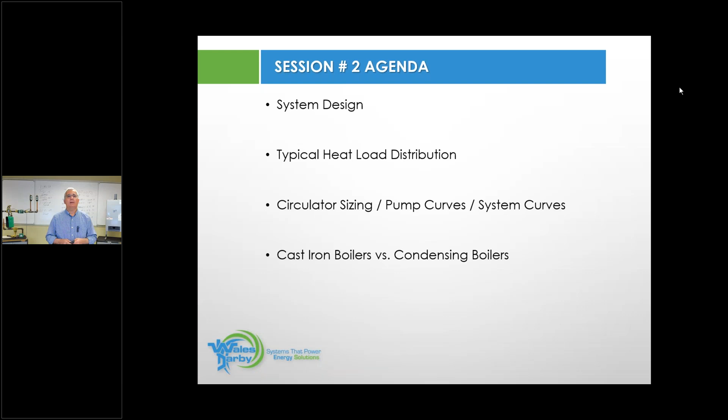You have to show the inspectors that you've done the work, you know the BTUs, and you've done the right amount of research in order to size the equipment properly. To let you know what's inside the manual J is what this takeaway is all about.

This is the math, all right? Now there's all kinds of different software programs out there to do these heat losses. Manual J is just one of them. Uponor LoopCAD does a heat loss. It does it for a radiant system, or you can do it for baseboard. It does not matter.

SlantFin always had a program out there. There's a whole bunch of different ones. Some of them are free, some are a subscription, but you really should be comfortable understanding how to do this, because for the guys who do this, it gives you a huge advantage versus your competitors who don't. You'll be able to size the equipment exactly down to where you need it to be, and that gives you a distinct advantage when it comes time to purchase material. Somebody else may be just exchanging material for material, BTUs for BTUs, and there's a very good chance in the world of boilers that boiler was dramatically oversized. So this will give you a very good price advantage.

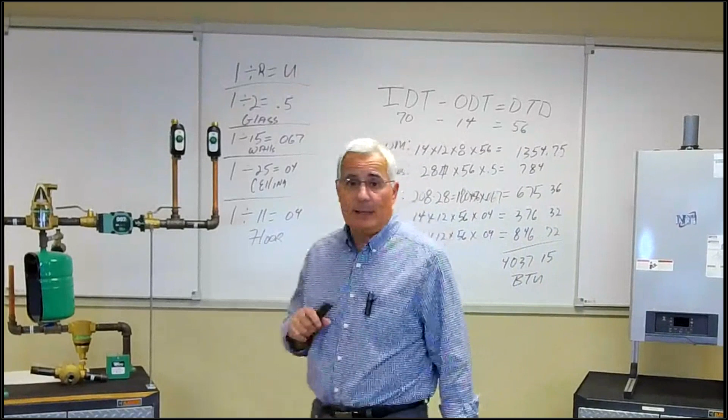Okay, Chris, if we can go to the board, please, behind, if you could zoom in there. So here's our room. I put together a room for you guys, and this happens to be my master bedroom at my house, which has 2 exposed walls, no heat above, and is over a crawl space.

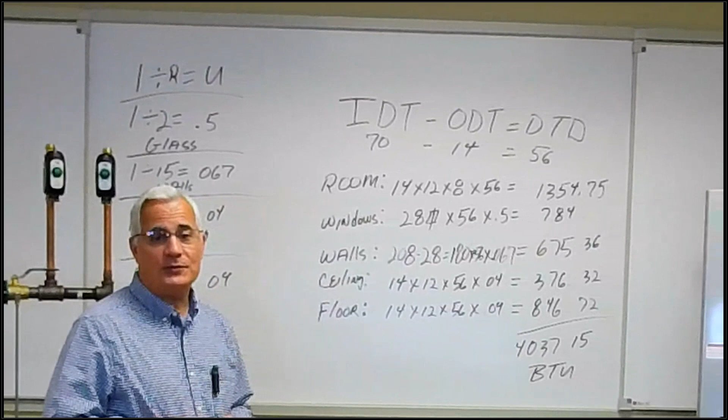So it's a big, big challenge of a room to heat, to make comfortable.

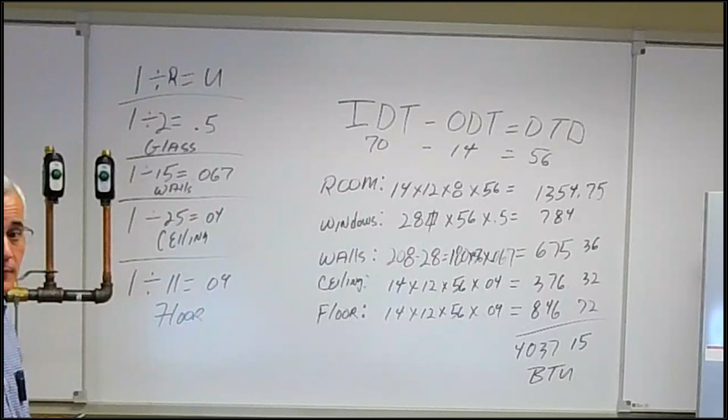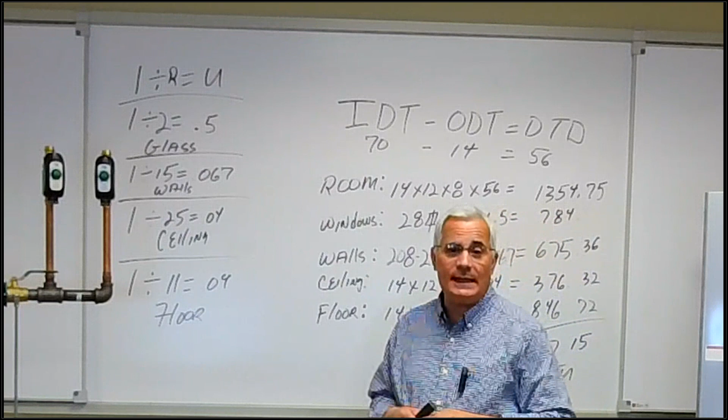On the left here, I hope you can all see that we made up our U factors. To get the U factor, we divide 1 by R. For my glass, which has an R value of 2, 1 divided by 2 is 0.5, so I'm going to use 0.5 for my glass U factor. For my walls, I probably got an R15 since the house was built in the 50s, so we end up getting 0.067 for my U factor for the walls.

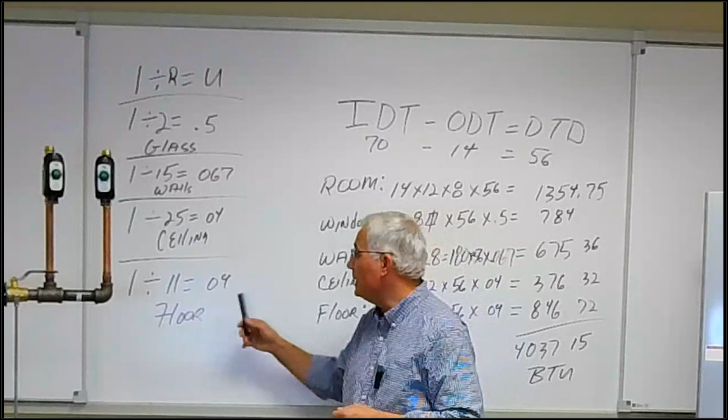The ceiling's about an R25, I should tighten that up, and that U factor becomes 0.04. And I am over a crawl space, so I did have to insulate my floor, so that U factor becomes 0.09. Yep, 0.09. So these are the U factors we're going to use in this heat loss for this particular room.

The room is 14 by 12 with 8-foot ceilings. So I got my 14, my length, my width, my height, times 56, my design temperature difference. If you plug those numbers in and math it out, you'll get 1,354.75 BTUs. Then the square footage of glass in this room is 28 feet, times 56 again my design temperature difference, times the U factor of 0.5, gives me a BTU of 784.

Then my walls, right? I've got a 14 and a 12-foot wall, that's the running linear feet of my outside walls. Add that together times 8, I get 208, but I have to subtract the square footage of the glass, that's where the 28 comes from. So I get 180 times 56, which is my design temperature difference, times my U factor of 0.067, to get another BTU of

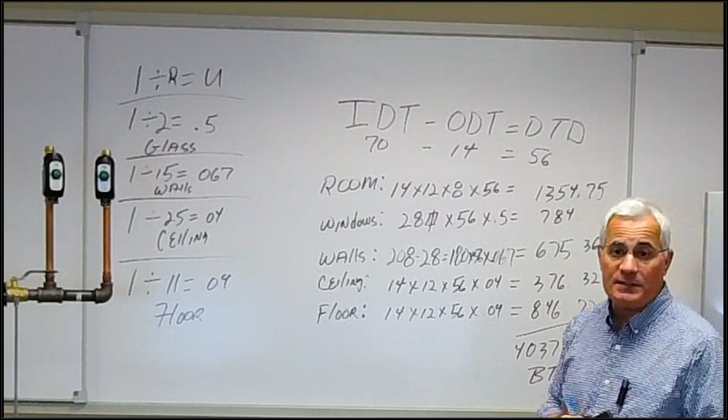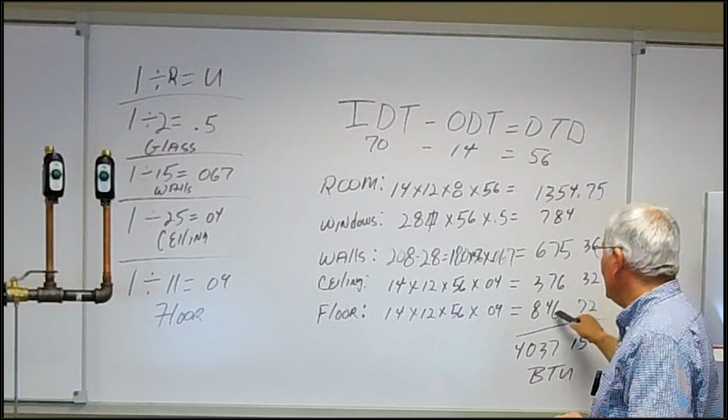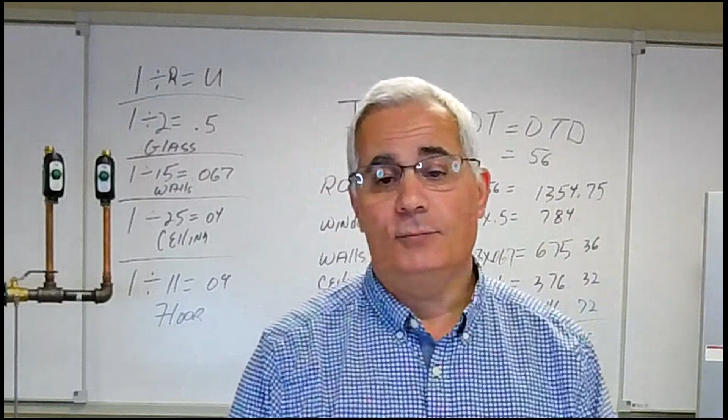675.36. I have to do my ceiling because my ceiling is exposed. So the 14 times 12 times, again, the design temperature difference of 56 times the U factor of 0.04 gives me 376.32 BTUs. Same thing for the floor, except the U factor is 0.09. Add all these BTUs together for 4,037.15 BTUs. That's what that room needs in order to maintain a room temperature of 70 degrees.

That was a speed date on how to do a heat loss, but that's what you're seeing in front of you with this design, the takeaways. I just plug numbers in on a particular room in my home.

Questions? Robbie, what do you think? You were looking at it saying, what's he doing here?

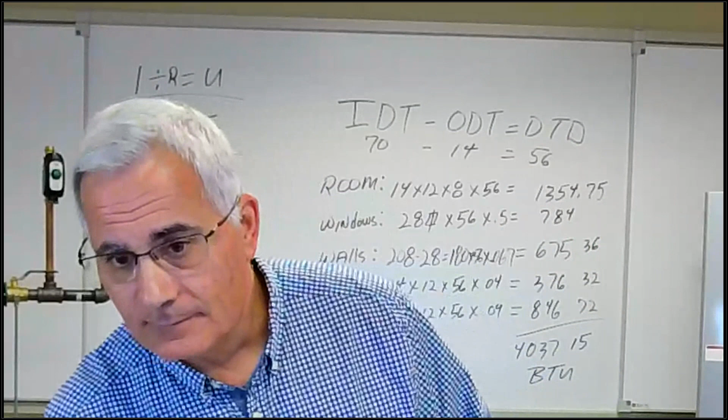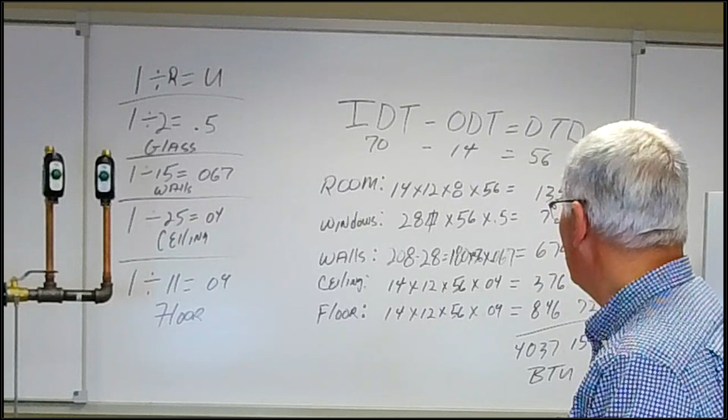I don't understand how you got the 1354 for the room. Well, it's 14 times 12 times 8 times 56, that should be the math if I mathed it right. Did I do it wrong? I got 75,264. How'd you get that high a number? 14 times 12 times 8 times 56, yeah. Really? Hang on, I could have fat fingered something, that's easily done. So 14 times 12 times 8 times 56. Holy mackerel, you're right, I think we forgot something there.

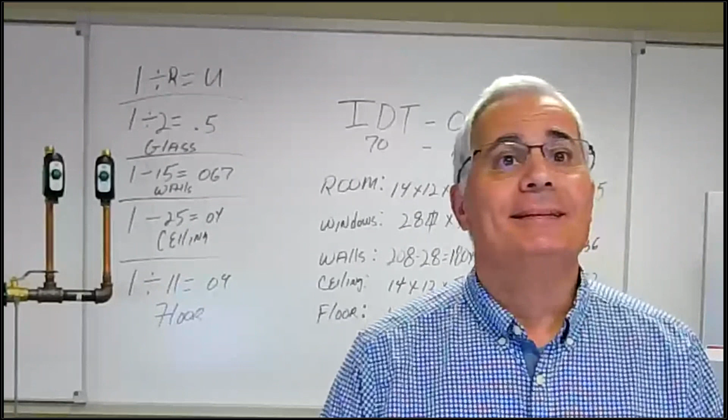Something's not right with that equation. What did I do wrong? Oh, this is embarrassing. Thanks, Rob. Well anyway, that's what you would do here: length times width times height times something. Oh, I forgot the infiltration factor, that's why. I forgot the infiltration factor of 2 outside walls, which is 0.018. Sorry about that, guys, we got to plug in 0.018 right here, and that's how you get that number.

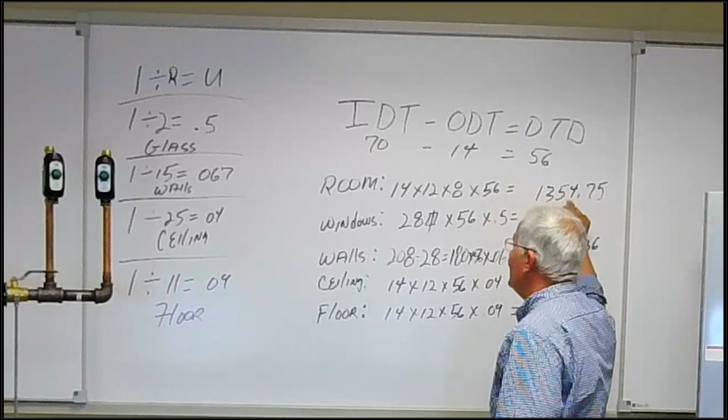Oh my, well, as they say, stuff happens. I hope that made sense. That's a little embarrassing, but it happens. Sorry, Jim. No, that's fine. And I even have it written right in front of me, shame on me.

Okay, so moving forward then, we would do this on a room-by-room basis. So my next slide, Chris, if I can have control, please. Real quick, Jim. Yes.

The chart you were just looking at, what page is it on in the Taco catalog? Do you know off the top of your head? That chart was part of our downloads, so it's not in the Taco catalog. Which one, the Taco TACO-Ways? Is that actually in here? I don't know, I'm sorry.

You didn't give me that one, just upload. Oh great, we're really striking out today. So we didn't send the takeaways, my bad again. Is there any way we can get that on there real quick? We'll send it to you guys after, we'll send it to everybody afterwards. All right, live podcast, here's what happens for live webinars. Jeez, all right. And then I got another question.

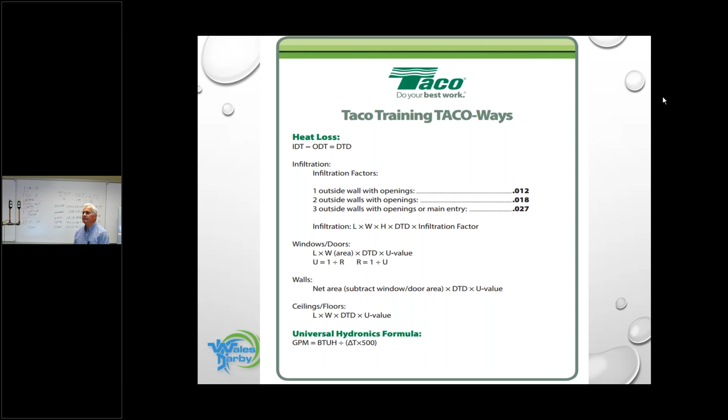This gentleman is asking, so you're saying 7 feet of baseboard is what you have? In that particular room, that's about right. Actually, they ended up putting 10 feet in. That is correct. It's a tough room, a very challenging room.

I have other problems there, I need to really tighten up the whole house. I can tell you, siding the house and putting Tyvek wrap around it made a massive difference, and also replacing the windows with better ones. At one point, 2 of the windows were just single pane, and oh my God, I could feel cold air washing over my face laying in bed. It was rough, but now with all those changes, the room's quite comfortable.

That particular room is zoned to the front of the house. That loop encompasses the front of the house and covers the area in the back. So that thermostat is in the front of the house. The way to get around that is I have an Ecobee stat in the front with a remote sensor in my bedroom, so now I get an average temperature reading between the two rooms. The comfort level in that room has changed completely.

That 7 feet or 10 feet, the gentleman's thinking really well. He probably did it based on high temperature, which is one way of doing it. But we're going to talk about options today for doing this with low temperature systems too, dovetailing off our low temperature webinar from about 2 weeks ago.

One more quick question: do all the values have to be multiplied by the infiltration factor, not just the room you're pointing out? Well, every room will have a different infiltration factor, because you could have a room with just one exposure, or a room with 3 wall exposures, or 2 wall exposures, right? They'll all be different. My wife's office has 1 exposure. But there's always going to be an infiltration factor, has to be.

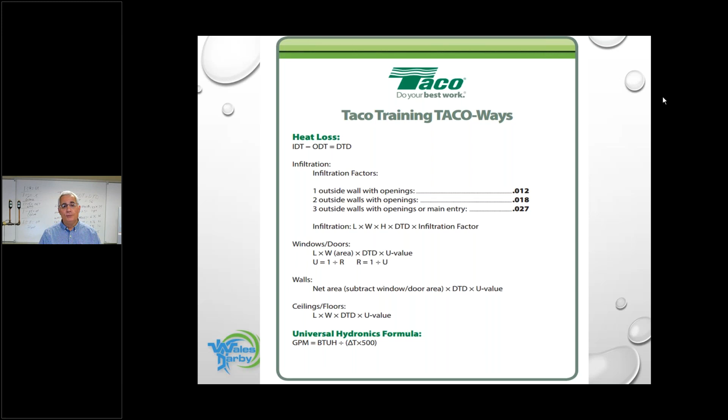Basically, what are we figuring out here, guys? We're figuring out the BTUs we're losing that we have to replace. That's what we're figuring out. So again, on a room by room basis, it's very, very important. If you don't know the BTUs per room, designing your system is going to be very, very difficult.

I can decide to set this up either as a standalone water heater for the baths and domestic hot water, or as an indirect, or as a combi. We seem to get a lot of people running to the combi, so we'll use a combi today in our design. What we want to be aware of is that we size the equipment as close to the load as possible. If our domestic and space heating loads get dramatically different, and there will be projects in our territory where the domestic load is much bigger than the space heating load, then we have to address that separately. We don't ever want to oversize a combi boiler for the domestic when the space heating load could be a lot smaller. But today we're going to use a combi since it's 2 bathrooms, 2 shower heads, not a big deal.

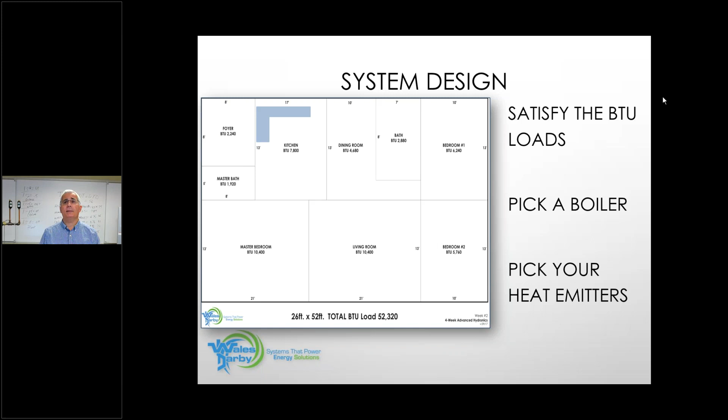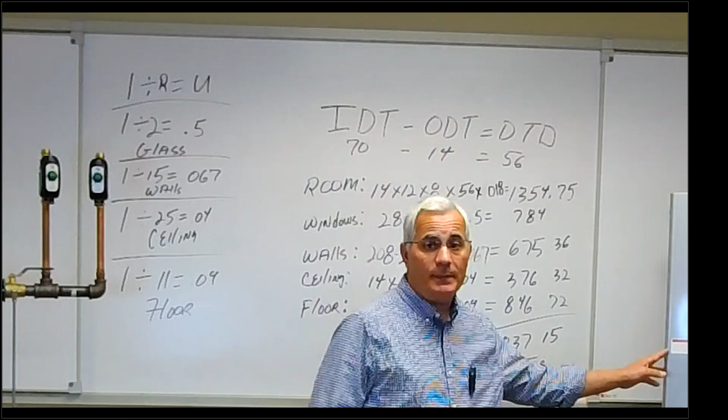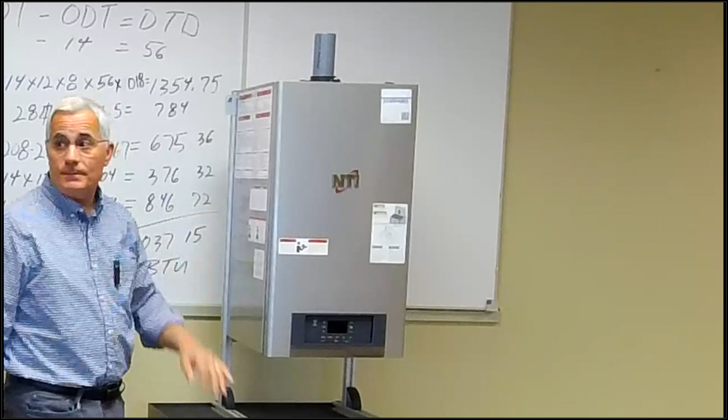So again, there's the NTI TRX. When you look at that boiler, Chris, if you can pan over here, I'm thinking the camera will pick this up. Well, maybe not, I'll move it a little closer. All right, this is an appliance design. The jacket has the color of a Mercedes-Benz. That all right, Robbie? All right, then we get the lights on there.

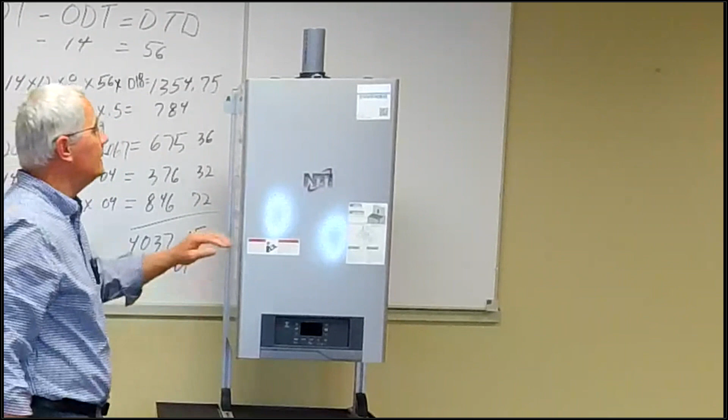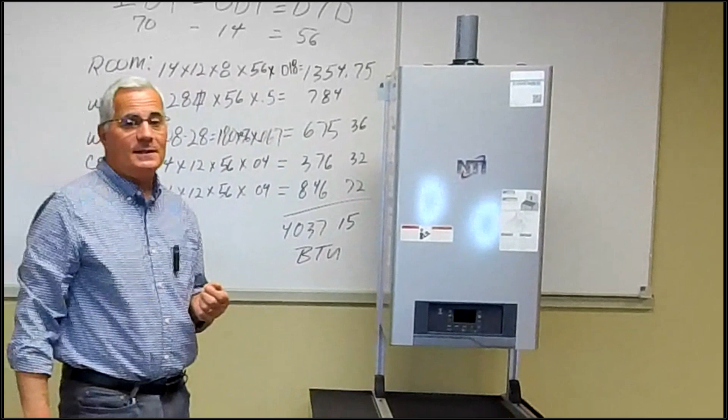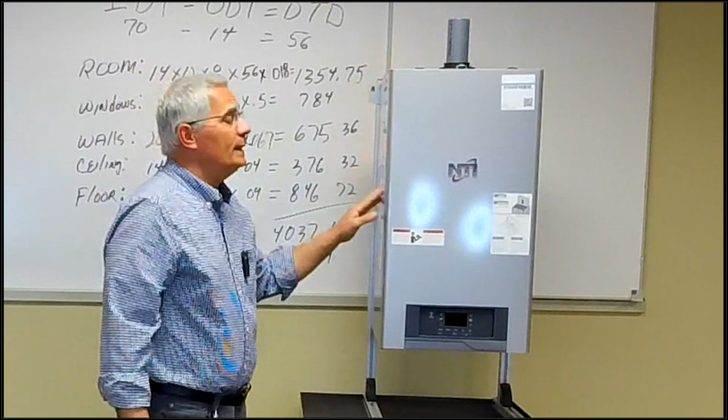Very simple control here on the bottom. This is actually designed to be within living space, because in Europe, that's what they do. They don't have basements, so it's not designed to be laying in a basement. In our world, it would be in a basement or maybe up in a closet on the first floor. We're going to have a 2-pipe system, bringing in combustion air and having our exhaust. Depending on how you set up your system and the temperature of your system, that will determine the material you're going to use for your venting, and we'll go over that.

Going back to the PowerPoint, on your screen is the spec sheet of the boiler. The first 2 columns on the left, under TRX 85 and 120, are heating-only boilers. Next to it, the C boilers, the TRX 110C or 150C, are the combis. We're going to give you the heating input, and you can see the range of these boilers. These are modulating condensing boilers, and they will condense if you're running them in the condensing mode.

If you were on our low temperature webinar that Anthony did, he went into great detail on what return water temperature you need. You need a 130 degree return to start entering the condensing mode, and the colder it comes back, the more efficient the boiler becomes.

So you see the range, 9.4 to 85,000 BTUs. These are modulating boilers that can fire as low as 9,400 BTUs. So this is an 11 to 1, a 10 to 1 modulating boiler. This is a big deal. You want these boilers to follow outdoor temperature.

Because the heat loss, we just did a speed date heat loss behind me, and we based it on the average coldest day of the year. It is not the average coldest day of the year every year during the heating season, it varies all the time, so our heat loss will vary hour by hour. If the boiler can adjust its output based on outdoor temperature...

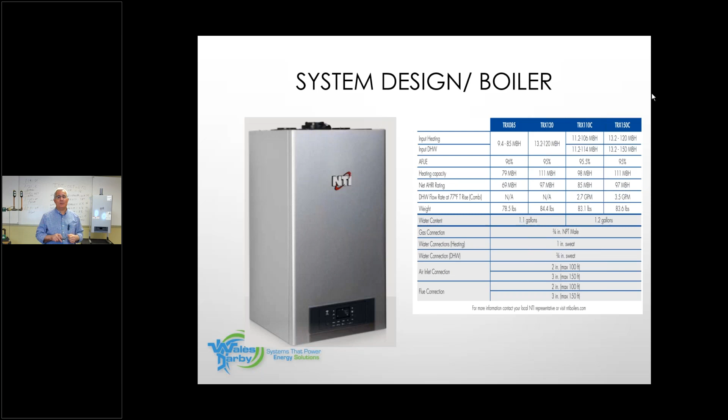Since you brought that up, my next slide happens to do with heat emitters. Every single baseboard manufacturer gives you a spec sheet that tells you the output of their product. A lot of guys we meet just think baseboard is a 180 degree type of system. Who says it's 590 at 1 GPM? Who says it's 580? Some specs will say it's in the 600s.

But I have other temperatures there. So the importance of doing the heat loss, that speed date heat loss I did earlier, is you may find that not only was the boiler oversized in Mr. and Mrs. Smith's house, but also the baseboard.

Since that was my master bedroom in my house, my heat loss for my house was 52,320 BTUs. I replaced a 130 net output boiler, and the amount of baseboard installed in my house is equal to 101,540 BTUs at high temperature. So knowing what I actually need, I can take the baseboard that's already in my house and feed it at 150 degrees.

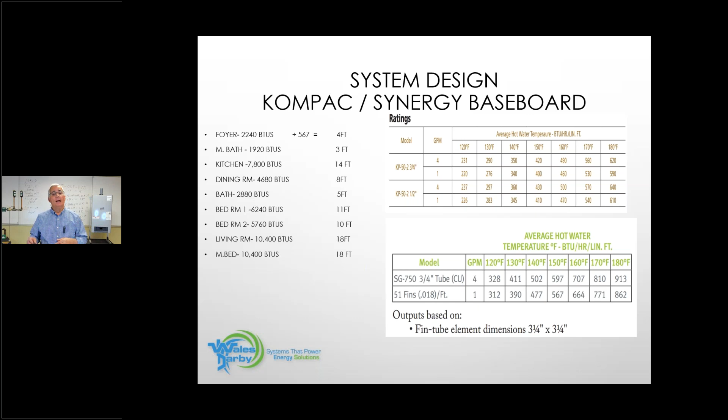This is on the Sterling website, SterlingBaseboard.com. But any manufacturer of baseboard will have these charts. This is nothing new, it's been around forever. Another option that you have is panel radiators.

What's a panel radiator? It's basically baseboard in a tighter package, or it can replace standing radiators that you've seen for years. They come decorative or they come industrial looking. It doesn't really matter, you can get very stylish looking types of panel radiators.

But a product like this is something to consider when I have a room where I don't have a lot of wall space. You know, I have this kitchen with cabinets, an outside wall, and an open area where people are going to be walking in and out. I may not have enough wall space, but I've got to get those BTUs in there. This may be another option for you.

Or if a room's going to have a lot of furniture in it, and you're only going to have a small amount of wall space, this is another option for you. You can mix and match this with baseboard all the time, or do the whole system as standing rads. This is what they do in Europe when they do hydronic systems - you don't really see baseboard, you see these panel radiators.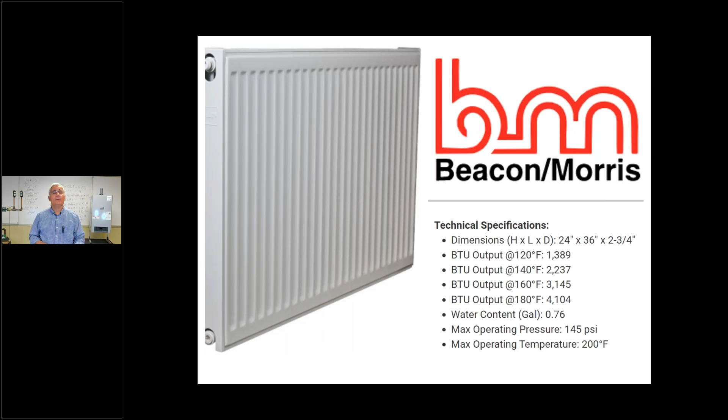Okay? So if we're looking at that floor plan, now we have to figure out how we're going to zone this. So that question came up.

This is always a very interesting question or discussion I have with contractors, especially when I'm doing a radiant design with them. They may tell me, don't zone every single room, or don't zone as many zones as you normally do - cut down the zones. I need to be able to get this job, I've got to be sharp in my pricing. And to me, that's a dramatic mistake.

Because one of the advantages of hydronic heat that John talked about last week was the comfort factor. We shouldn't have wild temperature swings, we shouldn't have blowing air that gives us heat and comfort and then when it disappears, all of a sudden we don't feel as comfortable. And the ability of zoning means I can have different temperatures in different parts of the home, which is, to me, a huge advantage, right, Rob?

I love zoning, Rob loves zoning. In the wintertime at Rob's house, you can find snow - he likes it cold, all right? But in my house, we like it at 68. Certain rooms, we will drop it to 65. My wife or I are doing a workout in one of the rooms, I don't want it 68 degrees - that's too warm, okay? So I want the ability to change temperature.

So zoning equals comfort. So looking at this floor plan, when we do this live in person, I say, guys, how many zones?

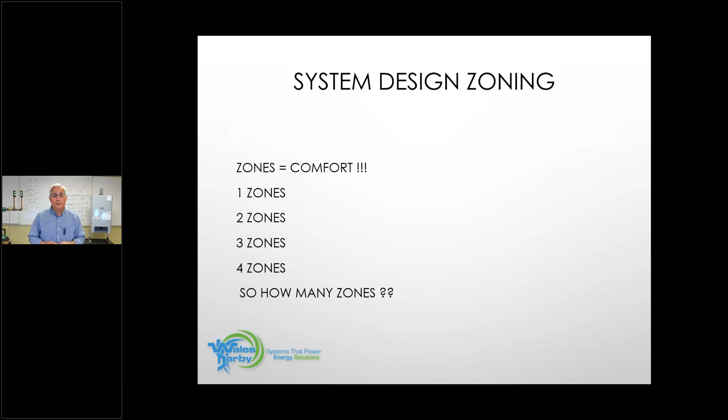Here are your choices: 1, 2, 3, or 4. So when you look at the floor plan right in front of you, I've had guys say let's make it 2 zones. They just cut the house in half, front and back.

So think about that. If it was 2 zones, where are you going to place these thermostats? Who's going to have control? 2 zones, I don't think is good.

So a lot of guys will say, well, I'll go to 3 zones. 3 zones is not bad, but again, think about who's going to be controlling what. Is that master bedroom going to be controlling a third of the house? Hey, they paid a mortgage, they should have control, but that may not deliver the comfort in the other rooms.

I particularly like to have bedrooms zoned because everybody likes to sleep at different temperatures. And the more you read about the best type of sleep, they always recommend a cooler, dark room. So if I can zone all my bedrooms separately, I can have more comfort.

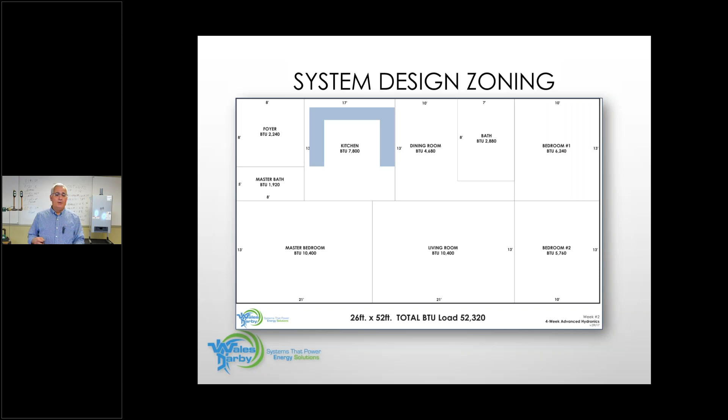So I'm making the executive decision today of going with 4 zones. Okay, Rob, you good with that? That's what I would go with. Rob is going with 4 zones.

So I've color-coded it here so everybody can understand what's going on. To make it as economical as possible, the red zone is taking the 2 bedrooms. I said I like to zone them separately, but it's not a big floor plan, so if we put both bedrooms on the same zone, it shouldn't be such a big deal.

And now you have thermostats today that can have a remote sensor. So I could have the thermostat in bedroom 1, if that's the north-facing part of the house, and put a remote sensor in bedroom 2, and average the temperatures between the 2 rooms to deliver a lot of comfort.

Then I have my blue zone, which is going to be the dining room, the bathroom, and the living room. The dining room maybe you use every day, or maybe it's only a weekend room when family's over, but you're going to spend a lot of time in that living room. And again, you've got the ability with these stats and remote sensors to average in certain areas.

The green zone I made the foyer, which is really just a walkthrough, the master bath, and the master bed. Master baths and master beds should always be a zone, or a separate zone each, depending on the size of that master bath.

Always remember, they're the ones paying the mortgage, they're the ones that are going to pay you, so you want to make sure they are comfortable. And last but not least, I made the kitchen a separate zone because it's going to be a challenge to heat.

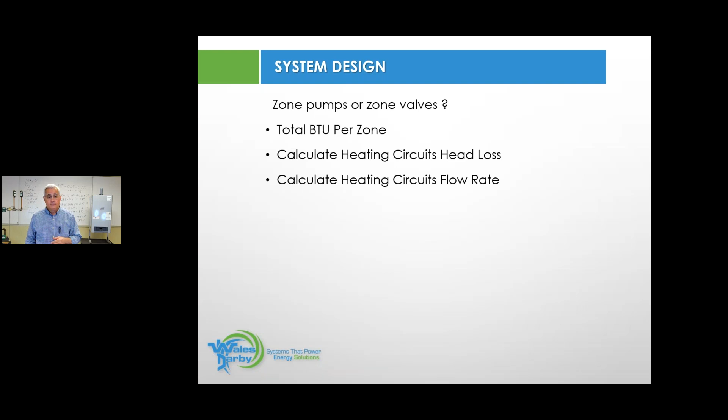So if we're going to do it with zone pumps or a zone valve system with a pump, I need to figure out the head loss of the system, and I need to figure out the flow rate for the whole system or for each individual loop. So here, if I was going to do it as a zone pump job, meaning every single zone gets its own circulator, I need to measure each loop, need to figure out the length of each loop and the total BTUs per loop.

So if I look at the red loop and add up the BTUs, it's 12,000 BTUs. If you remember John's universal hydronics formula from last week, GPM equals BTUH divided by delta T times 500. We're going to go with a 20-degree delta on this job. That gives me 1.2 GPM.

I have to guesstimate as best I can the length of that run. If this was a retrofit, I got to walk it off, measure it as best I can. But if I'm designing it from scratch and I've got the plans in front of me, I can scale it out. So my best guesstimation for the red zone is about 84 feet. If you look in your Taco catalog and use our head loss formula, 84 feet times 1.5 times 0.04 would equate to 5 feet of head. So I know my GPM for the red zone and I know my head loss. Good to go - we're going to do that zone by zone.

Blue zone, which was 17,960 BTUs, that becomes 1.8 GPM - because it would be 1.79, we rounded up to 1.8. That's about 98 feet in length, and if we use our head loss formula, we'll get 5.86 feet of head. We could call that 6 feet of head.

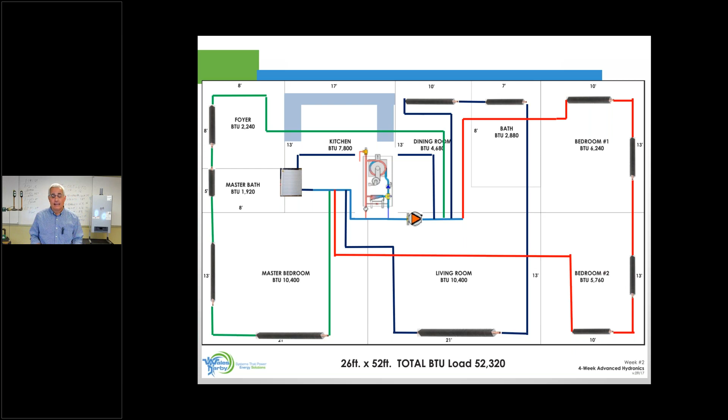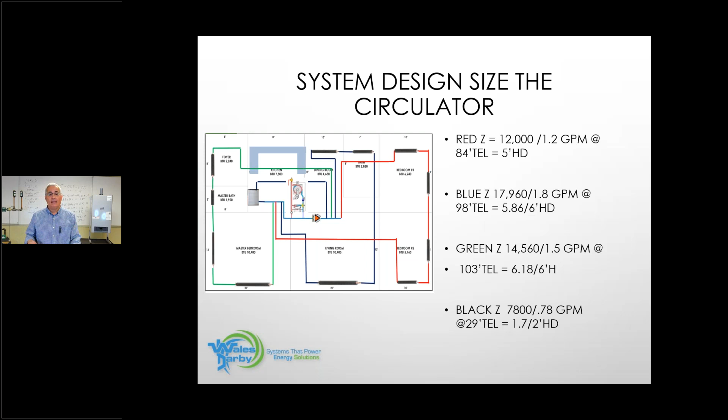We need 52,320 total BTUs for this job. So that's going to be 5.2 GPM, dividing that by 10,000. Now, since I'm going to use a single circulator, we're going to go with whichever of these loops has got the highest head loss. My highest head loss here is going to be 6 feet. So 5.2 GPM at 6 feet of head, I can pick a single circulator.

So now if I go with my VT2218 and I pick my 5.2 GPM and plot it at 6 feet of head, that circulator will run. It will produce a pump curve. Right across there, it'll make its own curve, if all zones are calling.

Now, if all zones call, that's where we need to be. But if the temperature coming back to the boiler starts to rise because the heat loss of the building changed, because it's got warmer outside, the circulator is going to sense that temperature differential and start to slow down, because what it wants to do is maintain whatever delta you plug into it. So if we're going to maintain that 20-degree delta, if the temperature keeps coming back warmer and warmer, this circulator will slow down to maintain that 20-degree delta.

If I only have 3 zones calling, I'll probably be working at about 3 GPM, again 6 feet of head. If I had 2 zones calling, I'll actually work at about 1.5 GPM, 5 feet of head. And if just the kitchen zone called, I only need to be a little over 0.5 GPM, or just a little under 0.8 GPM there. There's nothing in the head loss, but I can only go as low as that curve on the circulator.

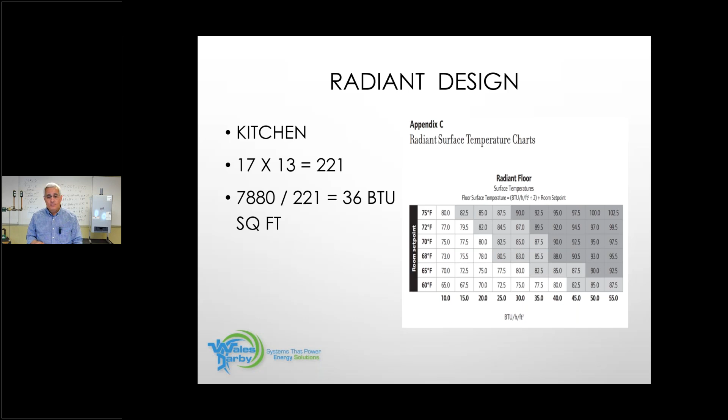So now that I know that, what's next? Now I've got to figure out how much tubing I'm going to need, and what's my method of attachment. You have a lot of different options in the world of radiant.

I could be above the subfloor, I could be below the subfloor, I can put radiant in the wall, I can put radiant in the ceiling. It's going to work either way because radiant heat acts like the sun, radiating energy up from that surface. So we're not moving air, and technically we're not even heating air, we're radiating energy from that surface.

So if this was a retrofit job, I'm probably not going to do a mud job, as we call it, where we're on top and put the tubing in mud, because that raises the floor area by 1.25 inches before I put the finished floor back down.

So another option is to do what's called a Quik Trak, which is 5/16 plywood with metal sheeting underneath it. That raises the floor 1/2 inch before the finished floor goes down, so you may have a slightly raised threshold walking into the kitchen. If the customer's not comfortable with that, I've got to get below the subfloor.

So we're going to pick below the subfloor here, using Joist Trak plates. You can see what I'm taking is the square footage of the kitchen and multiplying it by 1.5, because that tells you we're going to have an active loop length based on 8 inches on center.

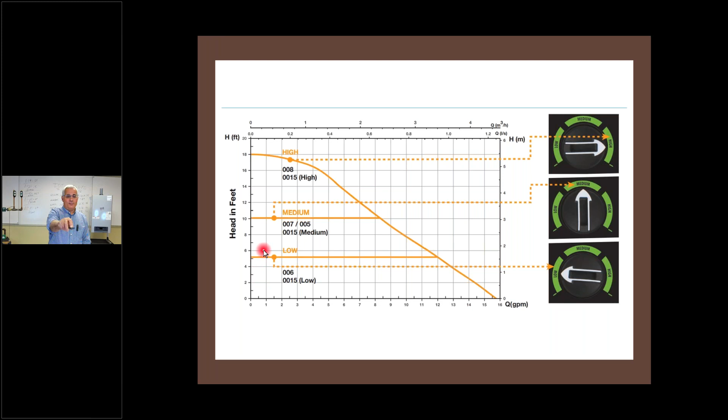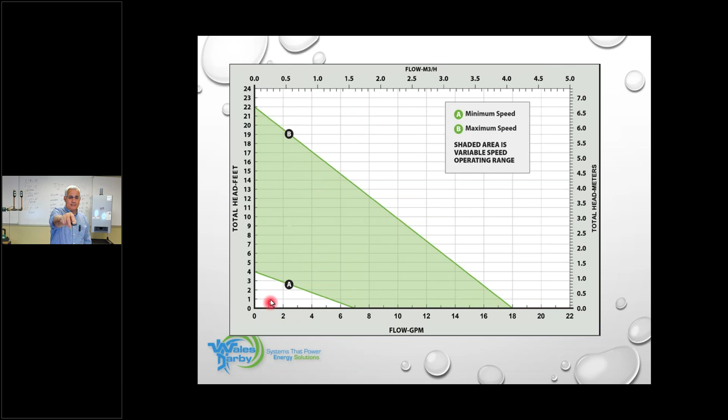We can back up to the 0015 E3 at medium speed - geez, I'm sorry, pointing at the wrong thing. 0.9 down here, a little over 7.5 feet, we would set it at medium. We'd operate here, so we would squeeze our delta a bit. Or if I use the VT2218, at 0.9 - again, I'm pointing to the wrong place - down here at 7.4, it'll run exactly right there. It'll create that curve and right there.

So if I want to nail it, I can go to VT2218. If I want to get close, 0015E3, set at medium. All right, so we figured out our radiant.

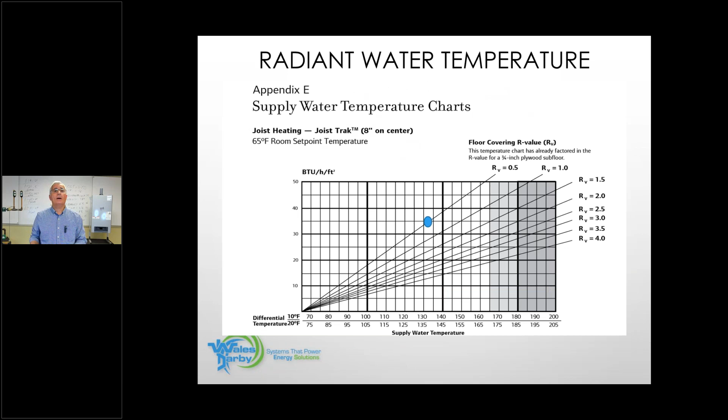One last thing, I may have to mix down the temperature. So on this particular project, if 150 degrees is going to be my supply water temperature, because I've got to base it on the coldest day of the year, and I only need 133, I've got to mix down. You've got options. There are standard mix valves you could use. Taco makes the iValve, which is a 3-way, 2-way, or even a 4-way mix valve that has outdoor reset built into it. You give it 24 volts, you run a sensor outside and a sensor on the piping, and it'll determine its port opening based on the temperature needed, based on outdoor temperature and supply.

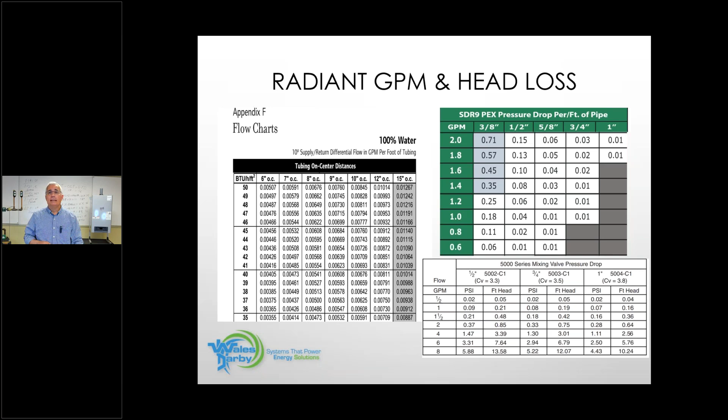Yes, sir. Cool. Robbie is typing away.

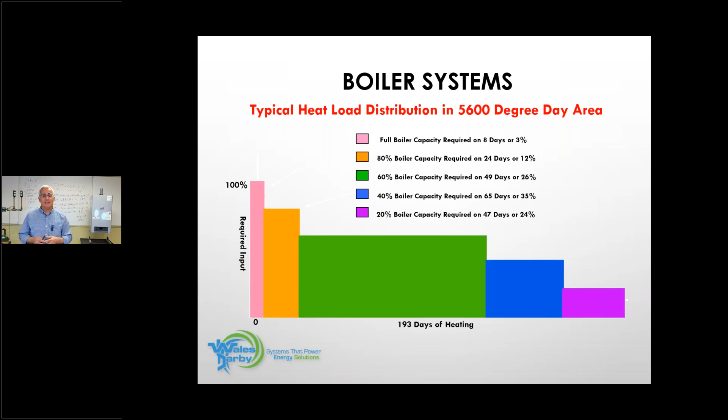And if you think about it, if you've nailed it and you're at full capacity because it's really, really cold, that boiler should never turn off, because I've actually nailed the BTUs leaving the building and I'm replacing them with the exact amount. Then on those milder days, especially if the boiler can modulate and change its output, I'll be more efficient. We don't want to oversize. And if you remember from earlier, when I picked the combi, I'm not oversizing it to meet domestic load. If the domestic load is much larger than the system side, we do a different type of domestic system — maybe an indirect, with more volume, which we'll be talking about in the next couple of classes — or maybe we have a separate heat source just for domestic.

All right, so cast iron boiler systems, and we're getting near the end here. Cast iron boiler systems are very durable. They last a long time. They run at high temperature and don't need a lot of maintenance. Just check the flue to make sure it's really clean, make sure the burners are clean. Other than that, it's going to rock and roll.

Can you make a system like this even better? Well, yeah, you can. You can add outdoor reset to a system like this. This is what I have in my home. I do have a cast iron boiler.

Why didn't I go condensing? Venting issues, also budgetary issues, okay? So I went with a tightly sized cast iron boiler. I added the Taco outdoor reset to the system, and I'm saving 20%. I got the potential of saving up to 30, but I'm saving 20%, which is good enough for me based on my needs. You'll see there are 3 circulators here, and there are 3 mix valves on this system.

Most radiant jobs, if it's a whole house, will probably be a 2 temperature system. But if it is a 3 temperature system, fine. But if I change those mix valves out to a weather sensitive and outdoor reset mix valve, I add more comfort to the system.

Now, if you're sitting there thinking, geez, he wants to sell me all this stuff, yeah, that's my job, right? But if you think about it, if I'm offering these options to the homeowner based on comfort level, yeah, you are upselling, you'll make more profit, you'll deliver more comfort, and that ultimately is your job.

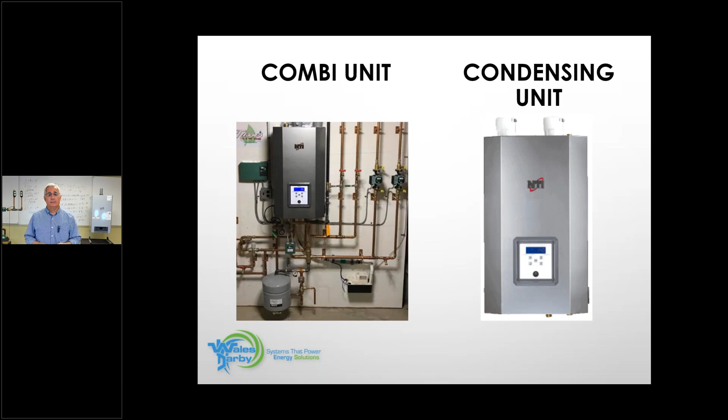So these guys should last, if you maintain them, about 15 years, maybe 20 years. But that requires maintenance. That requires pulling the burner out after 1 year of service to see how clean the heat exchanger is. That means checking the venting to make sure it's clear, okay? Very important, making sure I am not overfiring because of poor venting and damaging the heat exchanger.

So this is built-in maintenance. This is another way to be profitable on these jobs. If you vented it correctly and you're seeing a very clean heat exchanger after 1 season, you probably don't have to pull that burner for another 2 years. So the maintenance is something that should be done.

That's the way these appliances operate. You do have to let Mr. and Mrs. Smith know, and you want to make sure you take advantage of that, all right?

They should be efficient, but only if we design them to operate in that condensing mode. If you're sizing this guy and it's firing at 170, 175, 180, it's a fancy looking boiler with a great looking jacket on it and a cool control, but you're not going to be in that 95%. No way, no how. At 130 return is when I start condensing, and the colder the return gets, the higher the efficiency goes, okay?

We could take advantage of the turndown because this gets us tighter and tighter to the actual heat loss of the building. So when they first came out, it was 5-to-1s, then we got the 10-to-1s, and now we've got 11-to-1s. They're getting even tighter based on our job requirements.

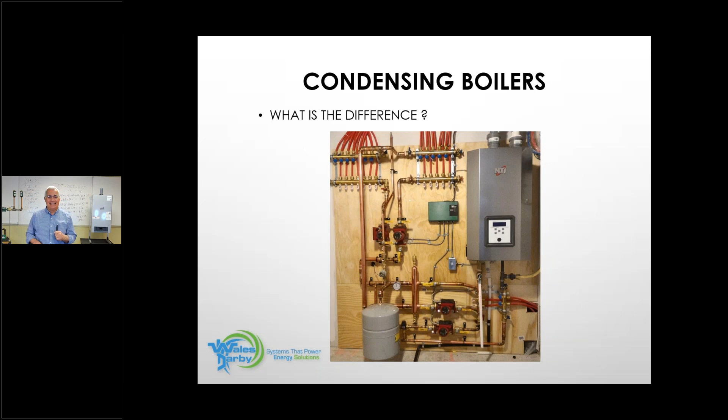So as we get to the end here, the big deal on the condensing boiler is making sure everybody understands what condensing actually is. What we're doing is cooling down the flue gases. Anthony talked about this very deeply when he did his low temperature class. Since my return comes back cooler, it cools down the flue gas temperature. The flue gas, you cannot normally see - it's a gas. If I cool it down, you start to see the white plume outside.

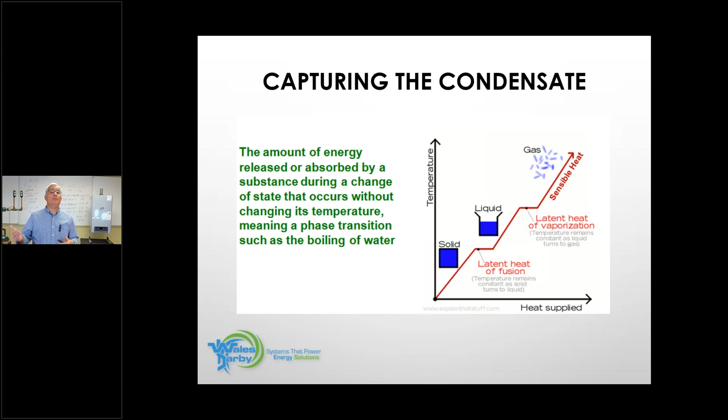That's not a gas anymore, that's a vapor. And if I cool the vapor down even more, it turns back into a liquid, and inside that liquid is latent heat energy. That's what we want to capture back into the boiler. So the heat exchanger inside this boiler is made to be able to capture that latent heat energy and not corrode.

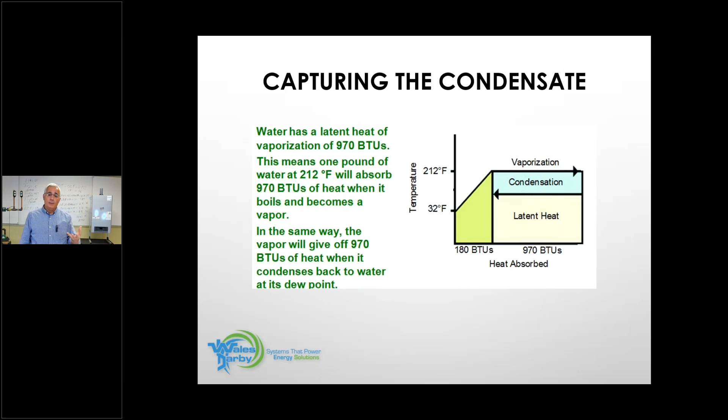So what does that mean? For every gallon of condensate I produce, I'm actually going to be able to reabsorb 8,080 BTUs back into the system, and that's when they're in that 90 plus condensing mode.

So to think about it this way, if I'm at that 90 plus percent, say I'm at 95, that means for every dollar I spend, 95 cents is heating my house and only 5 cents is going out the chimney or the exhaust venting, versus a cast iron, which is at 82%, for every dollar I spend, 82 cents is heating the building and 18 cents goes out the flue.

That's why we do this, gentlemen. So we want to make sure they condense. For every 100,000 BTUs, I should produce 1 gallon of condensate per hour.

This chart's showing you at 130, this is where we start in the condensing mode. But that's not my highest efficiency here. I'm probably at that 89. And then as I start to get colder, 120, 110, now I'm starting to get up into that high 90s, and if I can get below 100 on the return, that's where I can get up to that 95, 96% efficiency.

So all this work to make an efficient system, but I have to do this work, otherwise I'm just flat out guessing. And if you want to be at a price advantage versus your competition, this is the work you want to do. Now, if after all of this you're saying to yourself, I don't have time for this, partner up with a wholesaler who can do this for you, and there are wholesalers out there that do that, or you partner up with a rep, hello, where we can help you do this stuff.

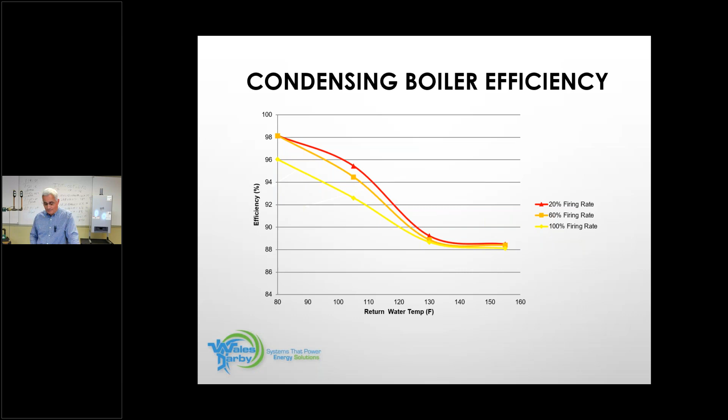So, Robbie, any other questions? You look like you're chomping at the bit. I have one guy who wants us to go back to the previous slide. I'm not sure exactly why, he didn't say. Which slide? Go back to this one? Yeah, maybe he'll come out with a question for that afterwards. In the meantime, I have another.

I don't know if this was a question or a statement, but the two loops, when you're talking about, I'm assuming he's talking about a multiple zone system off of a single pump. Those are, when adding your total head, it's in parallel, not in series.

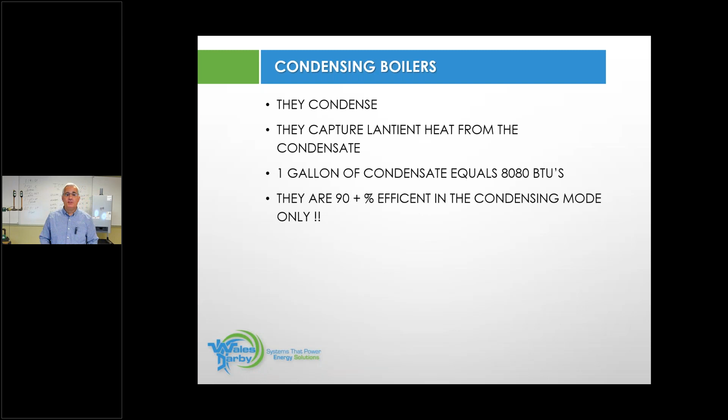As in, when I do a single pump and I have a zone valve system, I'm looking for the worst head loss out of all the loops. I'm looking for the worst one. So on this particular job, our highest head was 6 feet. That's the only one I have to worry about. If I got a 5 foot on another loop and a 2 foot on another loop and a 1 foot on the other loop, we're not concerned about that. We're concerned about the highest head loss. Right, we're not adding them together. No, we're going to the highest.

So keep this in mind: GPM is cumulative, so all the GPM per loops are added together.

So we know the GPM we need to deliver, so we can deliver the proper BTUs. But the worst case head loss, or the highest case head loss, is what we use to figure out the other part of the equation, to figure out our circulator size.

Okay, is this the screenshot he needed? Yes, that's what he was looking for. I did ask him if he had a question on it, so I'm just going to wait for that response.

And then there's another question here about flow control in the ceiling. I don't know what he's alluding to there, but he says flow control in the ceiling, why? I'm not sure, I don't understand the question either. Is he referring to maybe doing radiant in the ceiling, and how do I protect it?

Not sure. When you do a radiant system, regardless of where it is, floor, wall, or ceiling, there's always insulation under, behind, or on top, so we drive BTUs into the room. You said something about a picture that you showed, flow control in the ceiling.

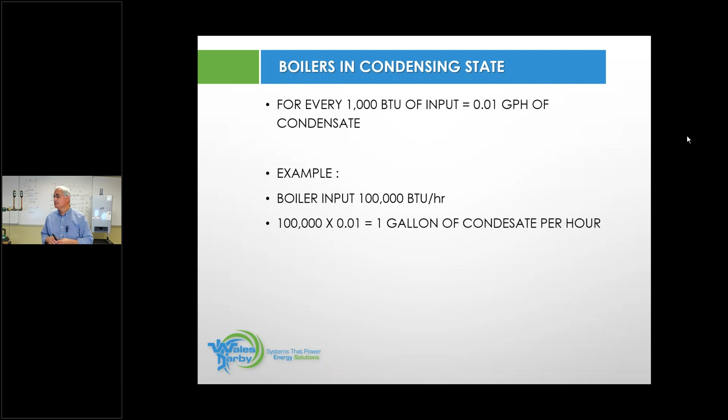I'm not sure, we didn't show a picture with a ceiling install. Not sure. What else you got?

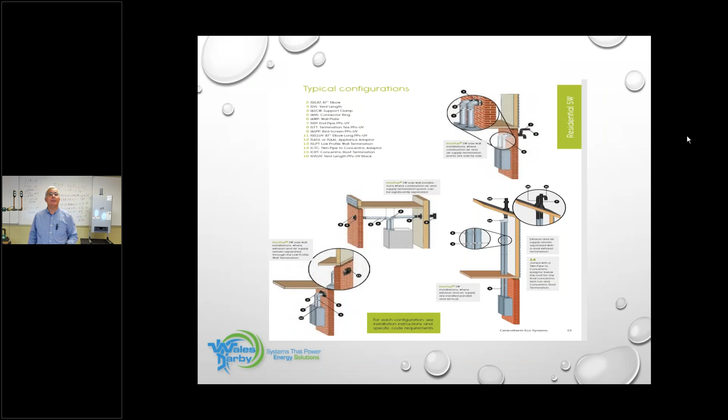You show 3 pumps and flow control on the ceiling. Go back to the... well, maybe it's up on the wall, and he's considering that the ceiling. Let's go back, is he talking about... well, that's back further. Back further? Yeah, that's on the wall. That's on the wall.

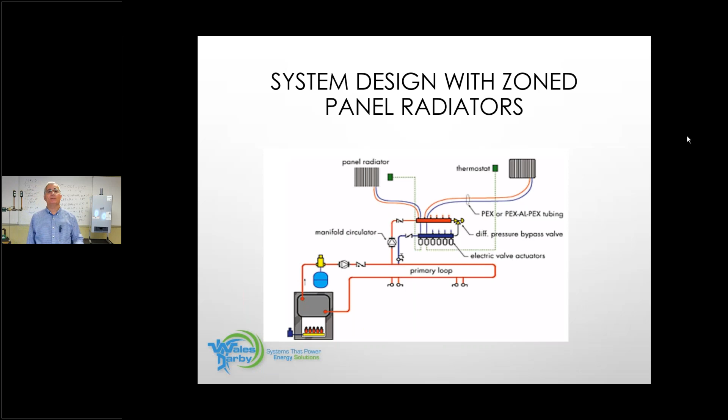He's talking about something like this. I mean, there's nothing on the ceiling. Is there a flow control up there? Well, there's a pressure differential bypass at the manifold, but again, not necessarily needed at all, especially when I use a variable speed circulator. So I don't have anything on the ceilings.

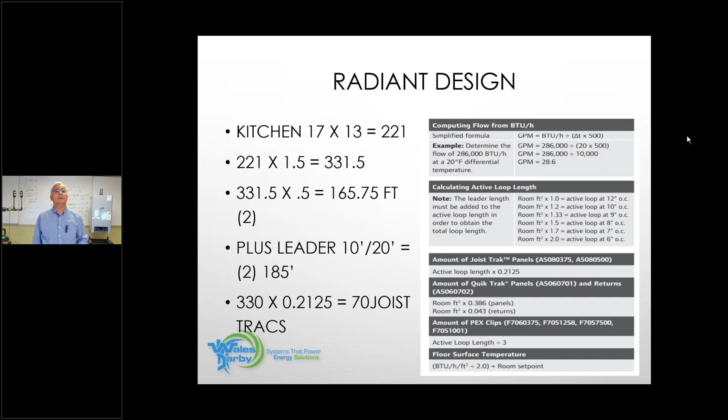Yeah, so that's why it's there, not on the vertical side of the pipe, because there are horizontal flow checks. So even there, with that circulator and those flow checks, they deliver more resistance than an IFC circulator. IFC means you've got an internal flow check in the volute of the circulator. So I'll get a better performance because I'll have less resistance with that flow check internal to the circulator versus the flow check that's separate in the system.

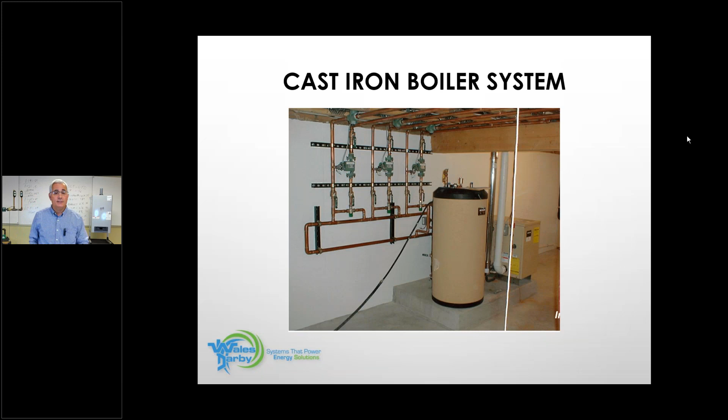And they're horizontal, so they have to be in this direction. If they were vertical this way, then I'll have the flow check always not operating properly. But aren't checks built into the pump?

Yeah, that's the IFC. Most of the manufacturers, at least with us now, you can buy the circulator with it already installed, but you can also, especially with our ECM, it's going to be in the box. When you take the cover off, it's going to be right there on the flap. You cannot miss it, and you have your choice of using it or not. Not every job needs an IFC. If I zone with pumps, I need an IFC, I need a flow check. If I do a zone valve system, single circulator, no need for an IFC.

What do you got there, big guy? That looks like it's gonna be it, I think. Yeah. We're good?

Mr. Whelan said, thanks for a great webinar. Thank you, I appreciate it, because Steve is one of the best hydronic guys out there. I always go to his webinar, Thirsty Thursdays, which I believe is this week.